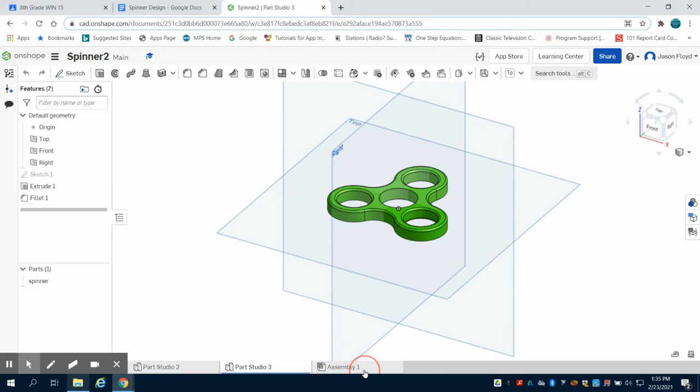I'm going to come over to my assembly here, go up to Insert, and insert my bearing and the body. I'm also going to insert two of my bearing hubs, just moving them out of the way so they don't get in.

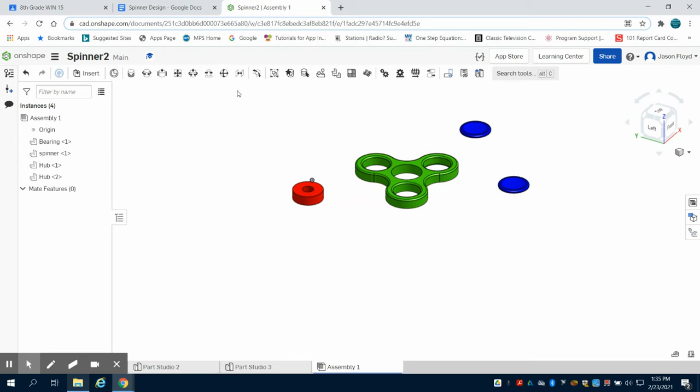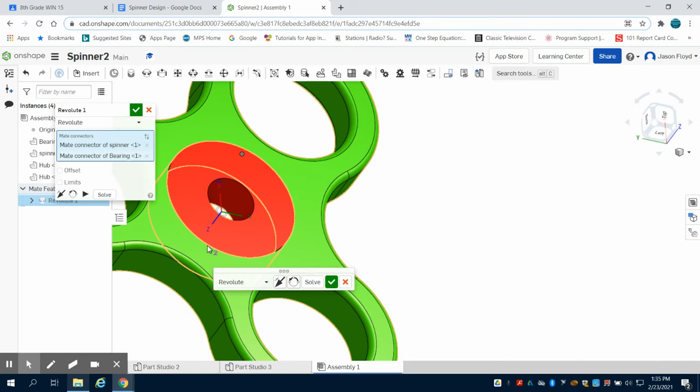I'm going to come up here to my revolve mate. I want to come to this piece right here and grab that center middle of that middle opening. Now I'm going to revolve here as well, and I want that same center middle of this bearing. So now I can green check mark this.

I'm going to come to my revolve here, right click on it, and click animate. If I press play really quick, I'll see if it spins - that'll let me know that I chose the right parts.

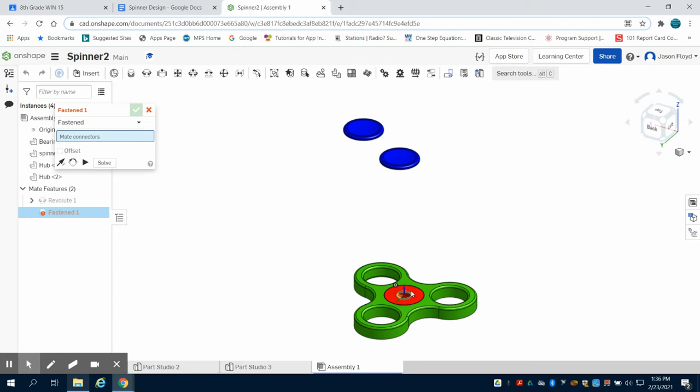I'm going to come up here to my fasten mate, and choose the top of this circle right here, and revolve around. I want to come here to this outside center point as well, and we can take a look - our bearing goes like that.

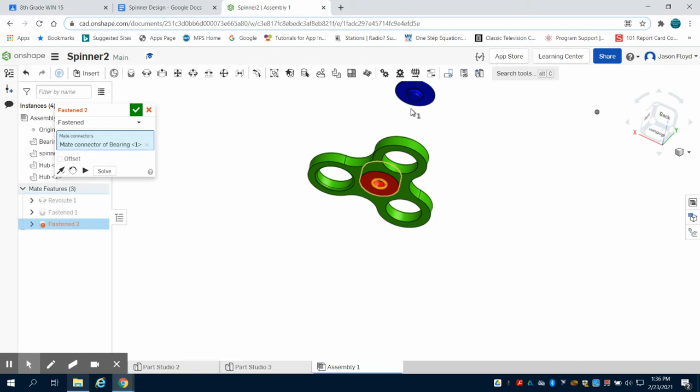I'm going to accept that. I'm going to choose that same bottom portion, that same portion here. Here I'm going to have to flip it on its axis - I see that in the preview there, and I can green check mark it.

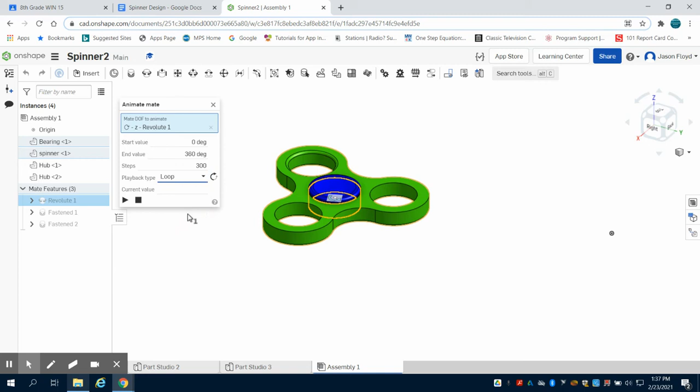Now I'm going to come back into my view here, come to my revolve, and click on animate. I want my spinner to spin 0 to 360 degrees, so a full revolution. I want it to not reciprocate, meaning spin one direction and come back, and I want it to loop, meaning continue to go in that spin. The number of steps sets the speed - the fewer steps, the greater the speed.

So as I hit play, we should see this loop happening. And we can obviously see that it's not working. So I'm going to pause for a second and problem solve.

So I figured out my error. If we come up here, if I take this bearing and right click on it and fix it, that's going to lock it in position. When I did the fasten mate with the hubs, everything stayed together so it wouldn't rotate. So now you can see I still have those fasten mates on, but I fixed it to a position so I have a central point that this bearing is pinned to the workspace so it's able to rotate.

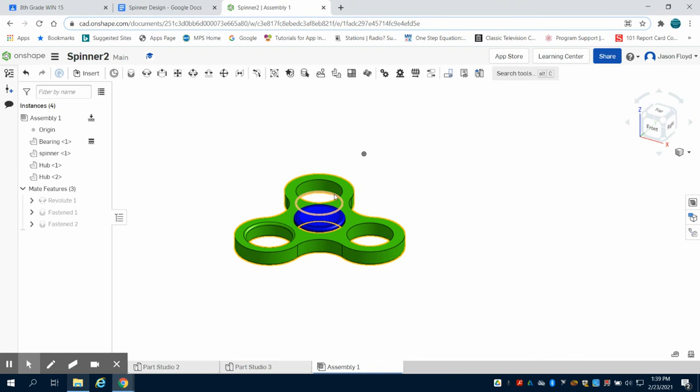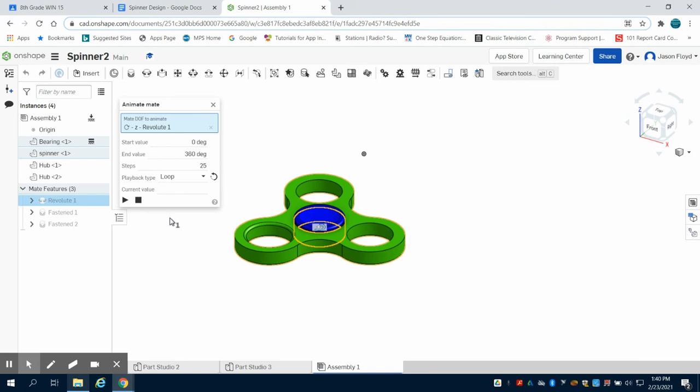So now I can come right click and animate, and you're going to see I want that loop. I'm going to change it down to 50 steps, and you're going to see my spinner spins, and I can flip my direction of the spin as well. If I'd like to go down to 25 steps and press play, we can see the difference there for it.

So I hope this helps as you're designing your own spinner.